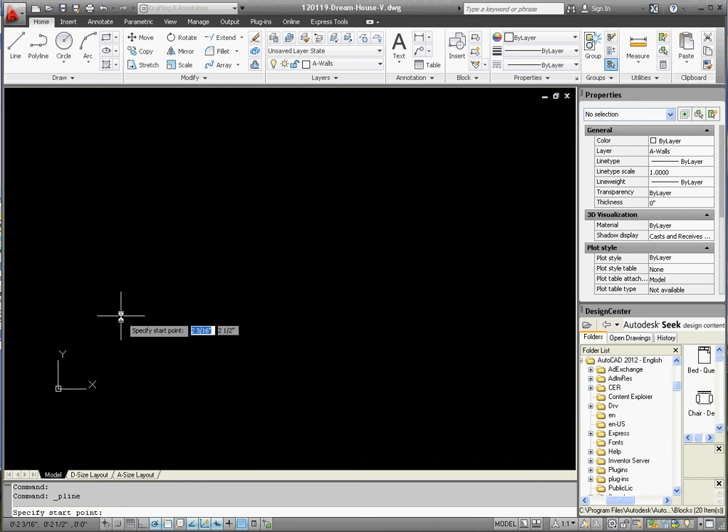So what do we do? Zoom extent, Z enter, E enter, gets it relatively close. As long as your scroll mechanism is available and can scroll easily within a certain range, you should be okay. So it's going to be 54 feet.

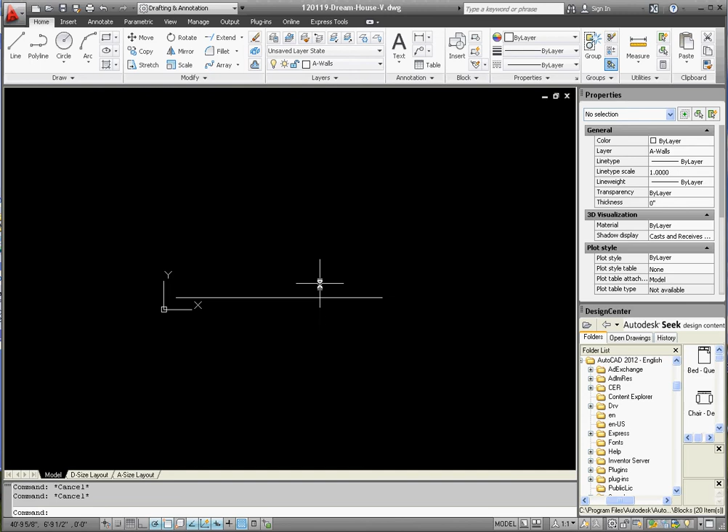Let's just draw the basic unit of the house. Maybe go up 20 feet, over 30 feet. I'm just going to draw something very basic. You might have something a little more elaborate than this.

Again, polyline. Let's go up maybe 30 feet here too. Let's go over roughly - you can look at your cursor and see approximately what the distance is. If you like that distance, put in a whole number. That's about 45 feet, so I'm going to type in 45 feet.

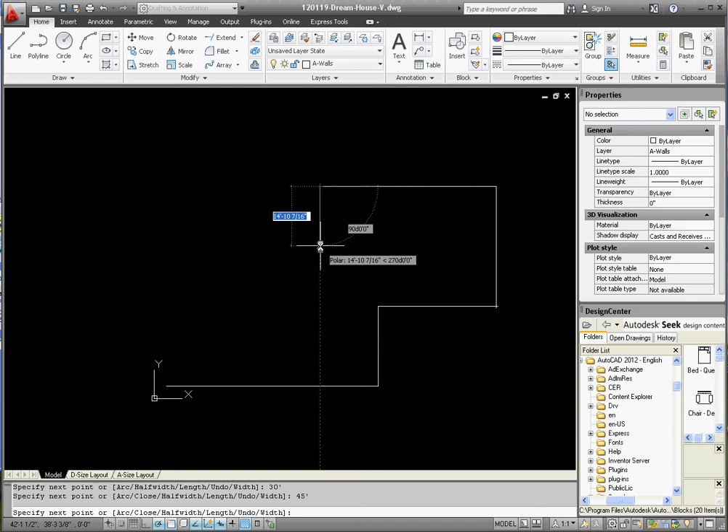Maybe come in a little bit, maybe create an area for a porch - about 15 feet, so I'll type in 15 feet. And go over, about 20 feet, up 30 feet. Over - I'm going to pick up this line and bring that back down. So there's a basic look of the house.

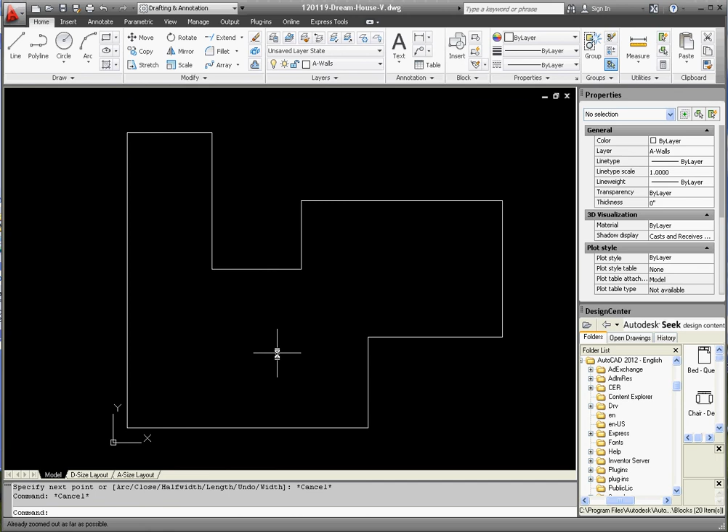I would suggest dimensioning as you go. Again, remember how we do that: you go to your A-size layout, and we're going to go ahead and unlock that.

We're going to scroll down. Our display is unlocked, so we'll go ahead and double click inside of that, go to zoom extent so it kind of fits inside, click on a viewport again, scroll down, and try to pick a scale unit that is roughly close to what we want - maybe 1/4 of an inch equal to a foot.

That really doesn't work too well. 1/8 of an inch - not working either. 1/16 of an inch looks like it'll probably work, and perhaps something a little smaller, 3/32 of an inch. Now it looks like we're going to have to stick to 1/16 of an inch. This gives you an idea of the iterative process needed to put this together. Once you have that scale done, go to yes, and we're about ready to go.

Remember a scale factor: if you click on that and scroll down, sometimes it'll tell you what it is, other times it'll put in architectural units. But 1/16 of an inch equal to a foot scale is a 192 scale factor. Keep that in mind. We're going to change our dimensions in the next film and move on.